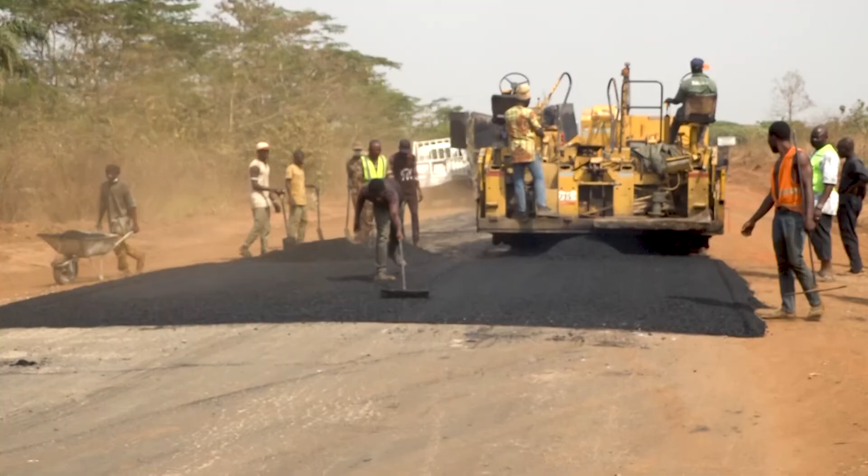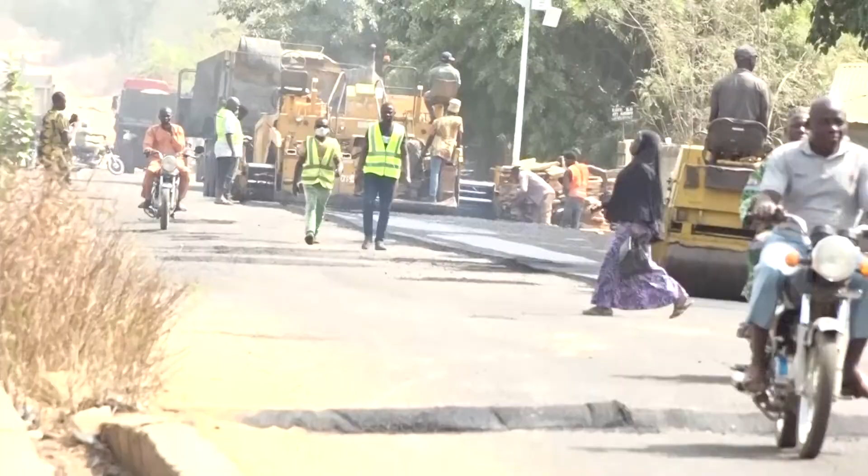Khaled Ibrahim explains the intervention of the federal government through the Ministry of Works and Housing. The projects going on here are being executed by the Federal Ministry of Works and Housing under the leadership of our able minister, Honorable Minister of Works, Mr. Babatunde Raji Fashola, who has graciously given us the opportunity to do what you see we are doing here.

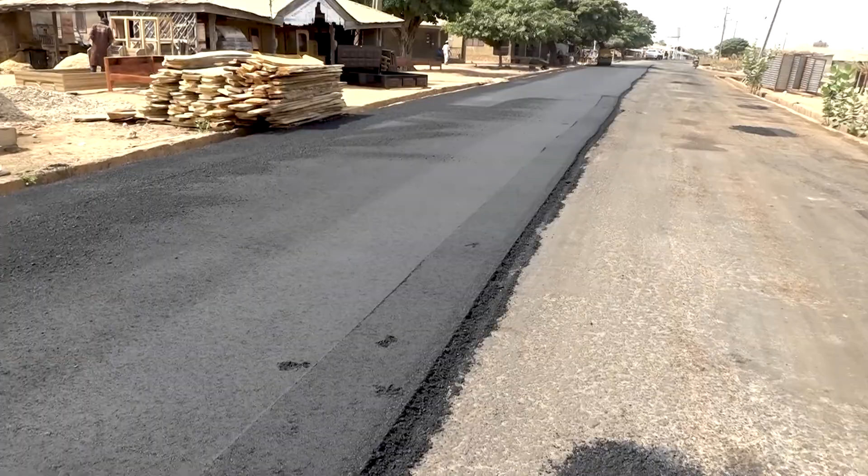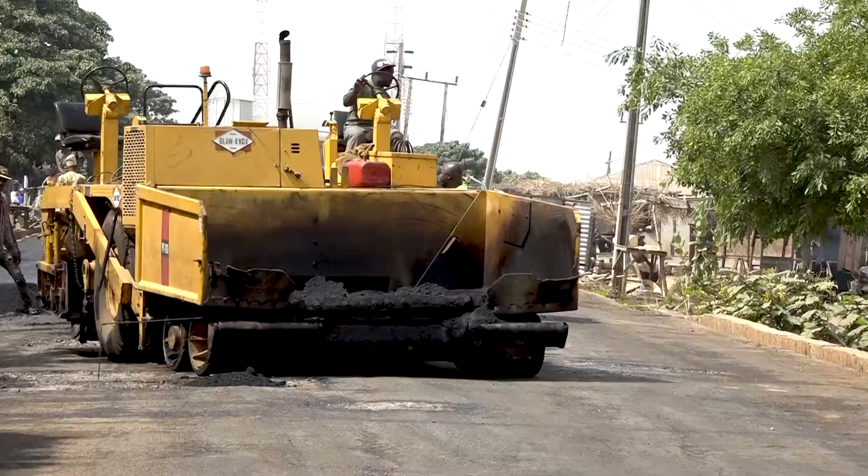Now, from Agunrege to Sepeteri, you saw the work we are doing. We're also working between Sepeteri and Igboho. That's an overview of the work that's ongoing. Before now, you saw the road was in bad shape. And when we sent proposals to our headquarters, it was approved, like I said earlier. And motorists, you can see now they're even begging that they should put some speed breakers on the road, because the roads are now very good, in good shape.

And if we continue this way, that is, if the people are not damaging the road by burning tires, by doing things that are injurious to the road, then the road will be in good shape. So the motoring public should expect good road in this axis, and not only in this axis, in Oyo State as a whole.

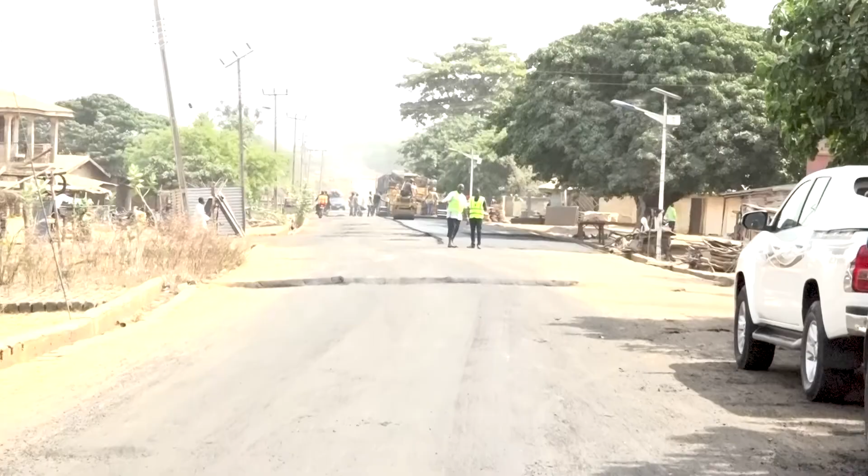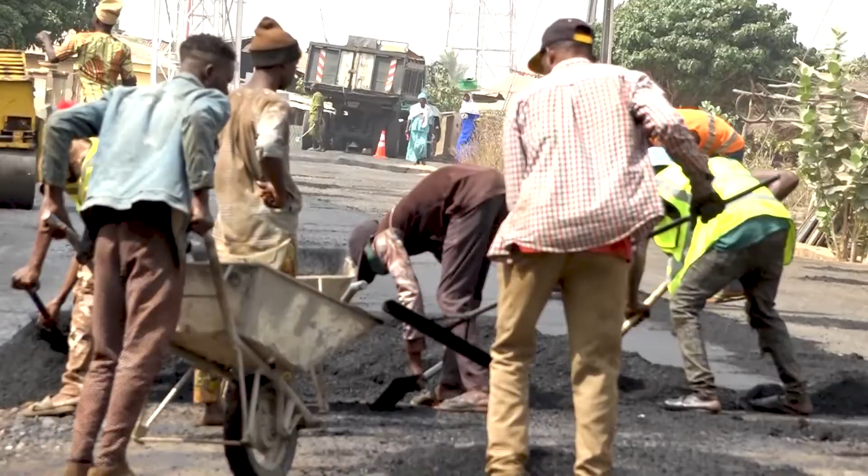It's needed that there should be free movement over this place, and as we can see the road is very bad, but we see that the construction is ongoing, which is very good. We are very glad to see those works because for some years this road has not been good, but we thank God for our federal government, sir, for the assistance that you give us on this road. We appreciate you, sir. We are very, very glad.

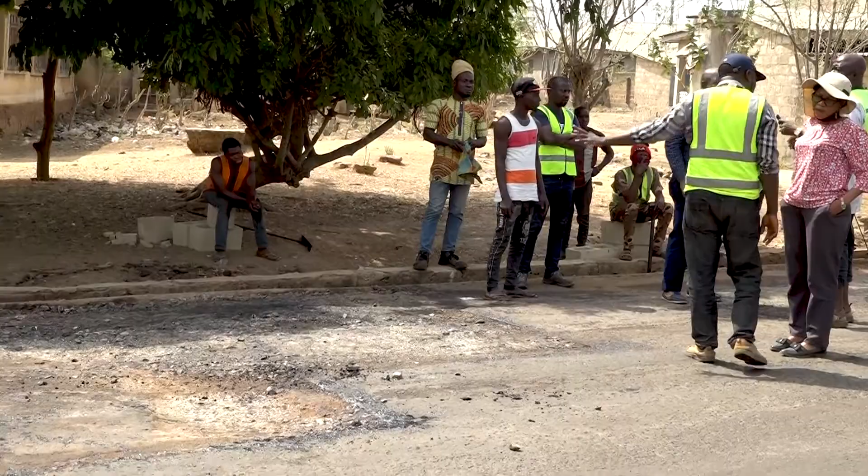Government has a contract already awarded from Iwo Road Interchange to Ife, Ilesha. That's a project that government has awarded, and work commenced towards the end of last year.

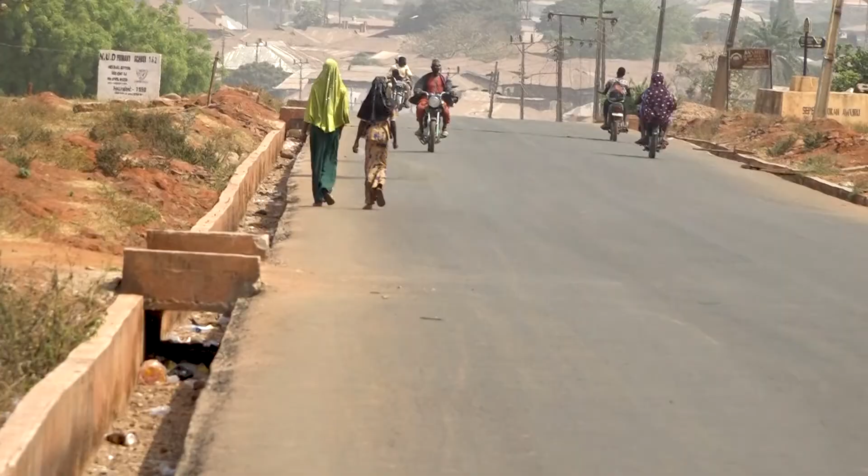Now, apart from that, there's another work going on between Oyo and Ogbomoso. A new alignment, a greenfield project, where you have multiple bridges. Even right there in the forest, there is a lot of bridge work going on, and with recent government arrangement for funding, the road is going to be completed in a very short while.

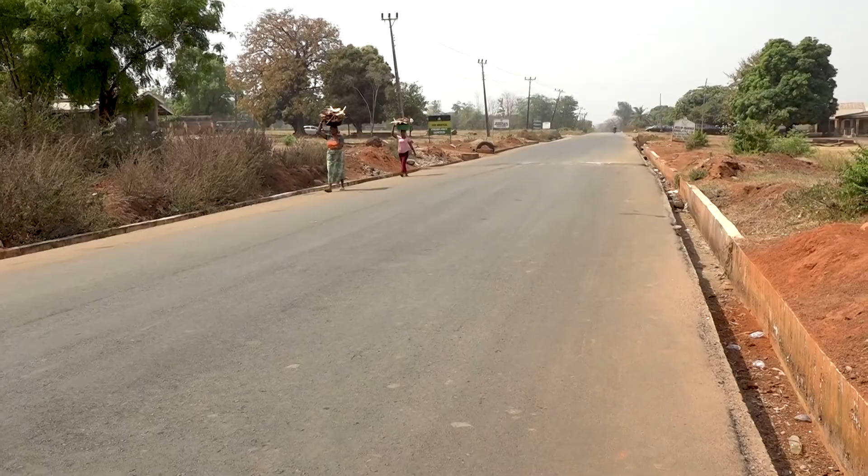But the way we are doing the work, we do not make it difficult for them. The one we are cutting, as we are cutting it, we are replacing it with a stone base. So we make things easy for them, and we are making the promise that when we finish the project, everything will be okay.

With the realization that it's almost impossible to visit all the 34 sites with construction works going on in a day, the team retired to continue the next day.

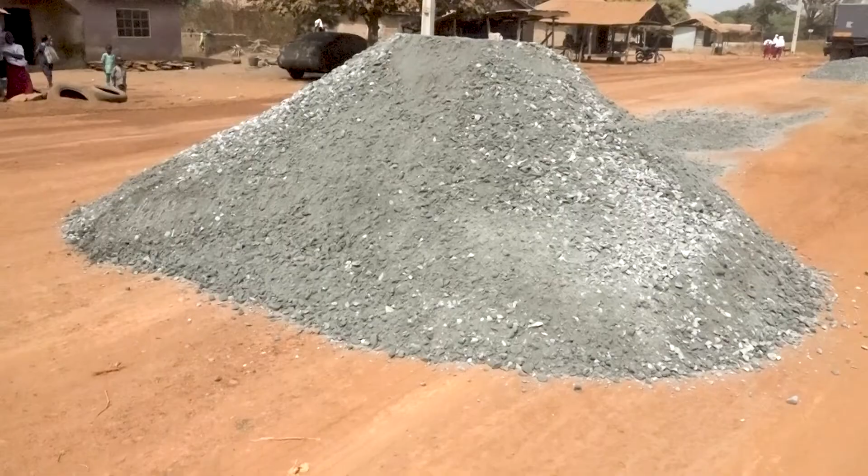On day 2 of the inspection and whistle stop tour, the team again took off from Ibadan to first inspect the 3 sections of the 43 kilometers Ibadan-Oyo Road, part of the over 100 kilometers long Ibadan-Oyo-Ogbomoso-Ilorin Road. The controller once again explains the scope of work on the road. This is Ibadan to Oyo Road.

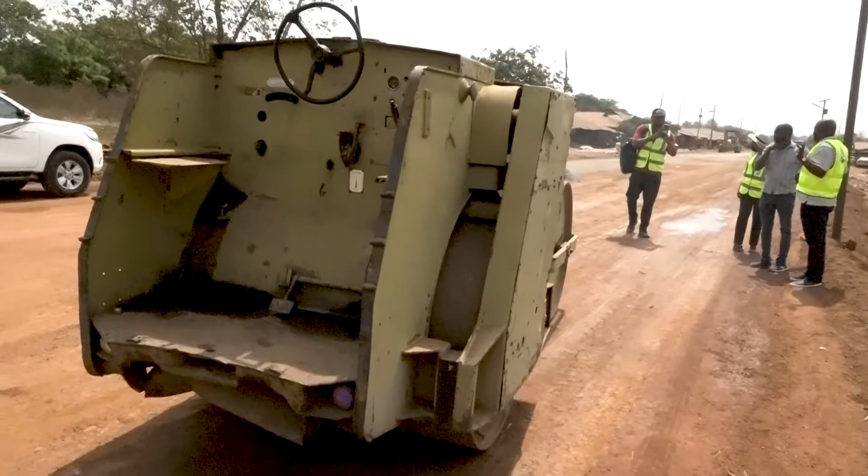Now we have some failed portions of this road, and government has graciously responded to attend to the failures on the road. From Ibadan here, this is Ojo behind us now, and this is direction to Oyo town. Now, the failed portions have been divided into 3 major sections, and the government is tackling between Ibadan to the first section. It's divided into 3 sections.

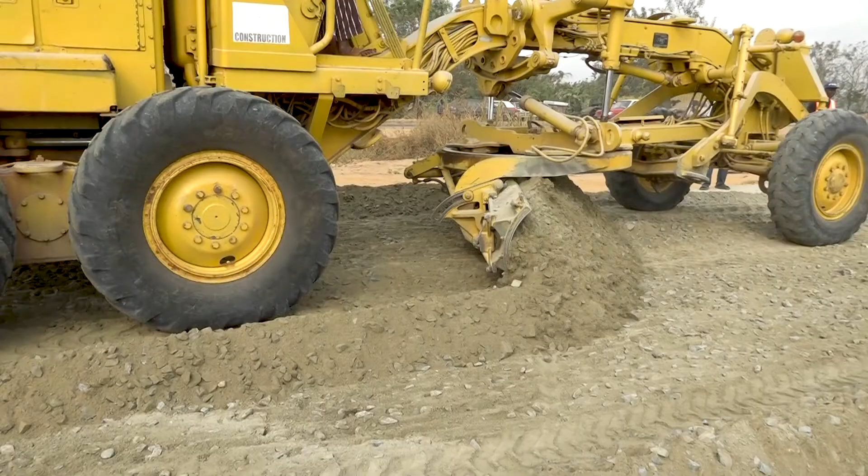I think the kilometer 22, the first 22 kilometer, and then another section in between 22 to, actually the road is 43 kilometers. So divided into three. One to around 15, then from 15 to 22, and then from 22 to 43. The contractors are working on them to make sure that the road is in good shape.

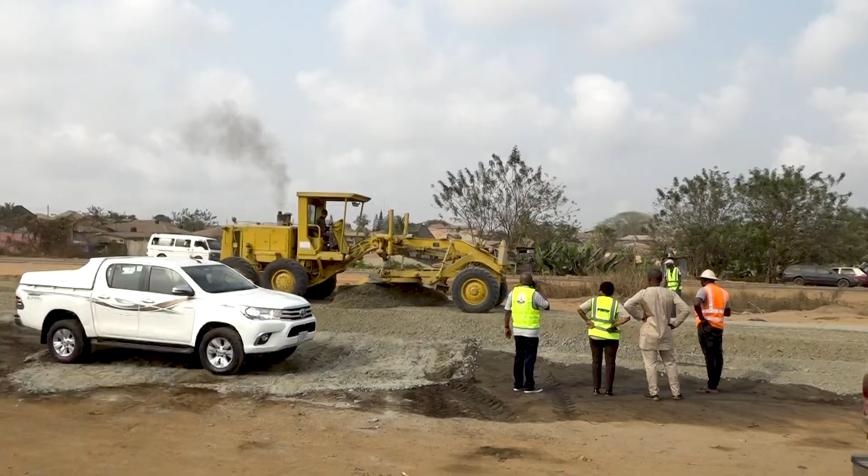It's a very tedious place because of the volume of the traffic. But so far so good, we've been able to do a little diversion to the other side. We are doing everything possible in order not to make the project itself very difficult for the people that will use it at the end of the day. So we are trying everything possible to make sure that we finish on time.

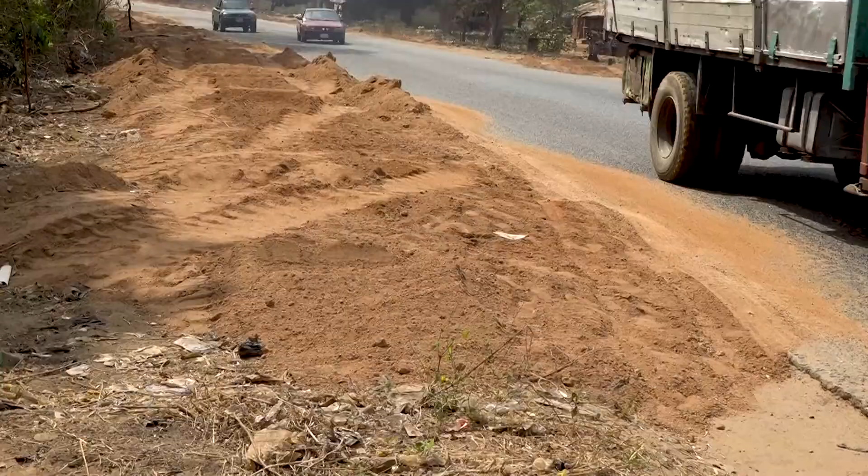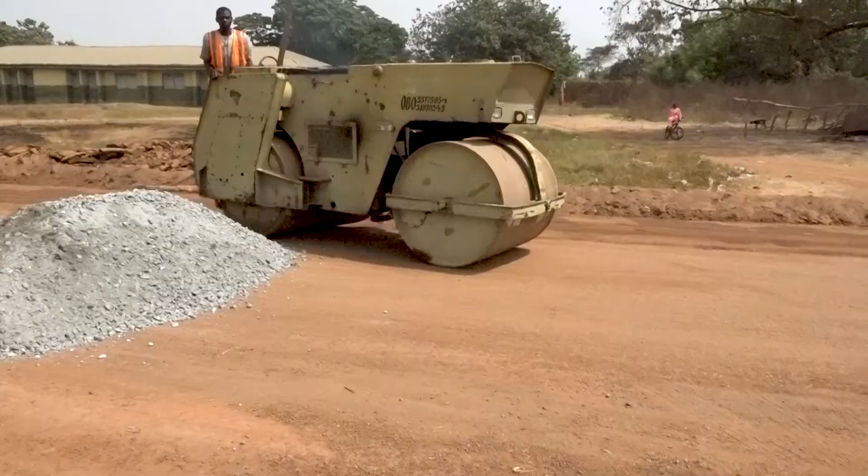He spoke on some of the other roads being attended to by the ministry in Oyo State, including those that were emergency repairs of sudden failure of portions of important roads linking the northern part of Oyo State, which is often referred to as the food basket of the state.

Now this is Ibadan Road. It is the third section. We were in the first section, which is kilometer 0 to 8. Second section is kilometer 8 to 25, where we saw some work ongoing there. They're laying a base course. Now we are at the third section, which is from 25 to 43 to Oyo town.

Now you can see, if your camera can look closely, this is a freshly laid asphalt. This is a binder course, and the wearing course is coming on top of this, just to make sure that this road is motorable and is good for the public.

That's our purpose. The contractor has gone very far. They're already laying binder. All that is left for them to do at this section is just the wearing course. So the work is a repair or intervention work.

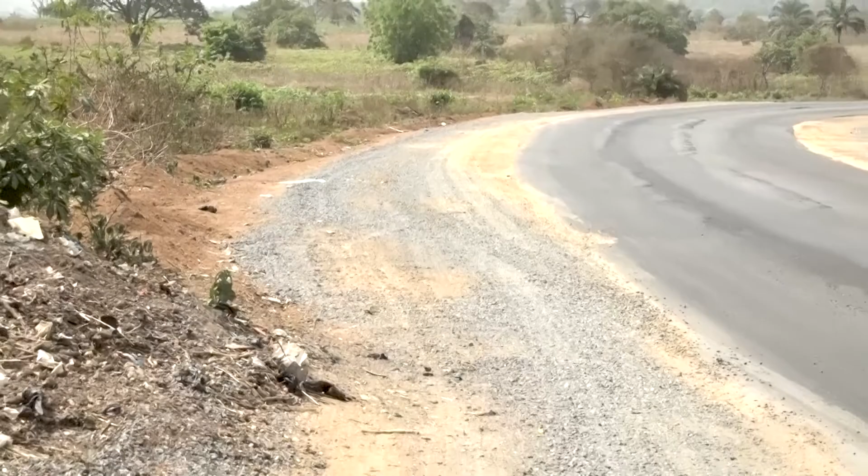To this resident on a particular section of the Ibadan-Oyo-Ogbomoso-Ilorin Road, it's a welcome relief after years of accidents and fire disasters caused by the bad section of the road. If a motor comes like this, and another one comes before this corner, the accident happens here, but now that they've widened it, since then we never see accident here again.

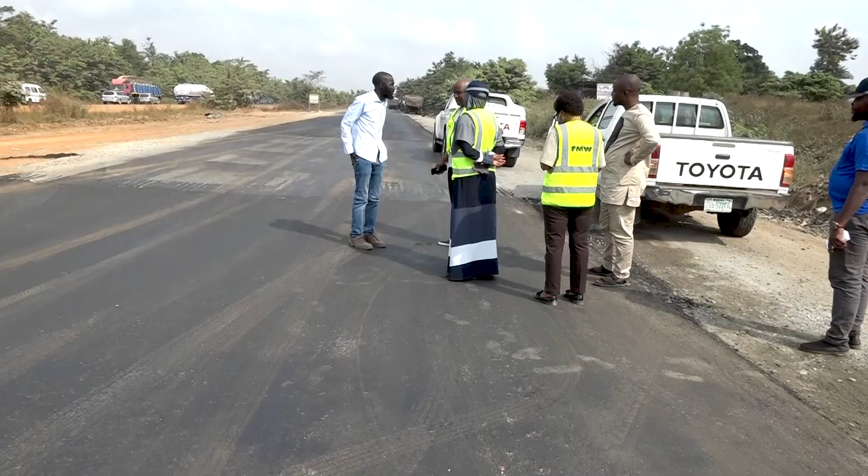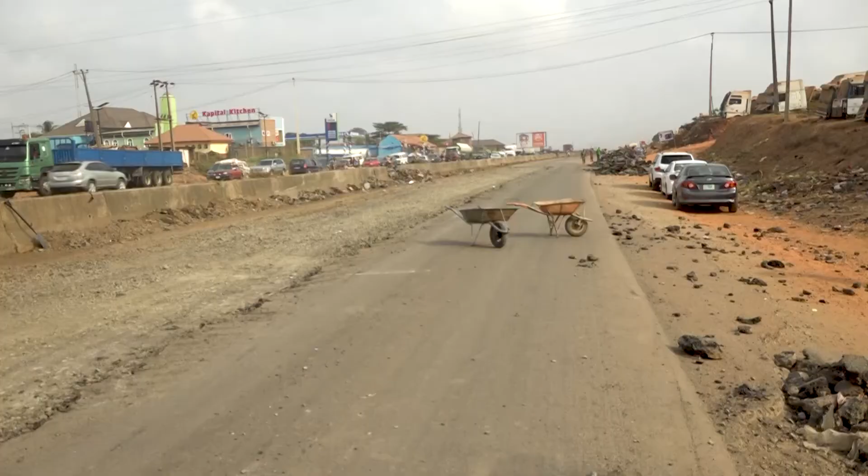At the end of the tour of project sites, the team left with a distinct belief that the move to provide infrastructure, ease the ability of people to move around and ensure that Nigerians have a better life is one that can be surmounted.